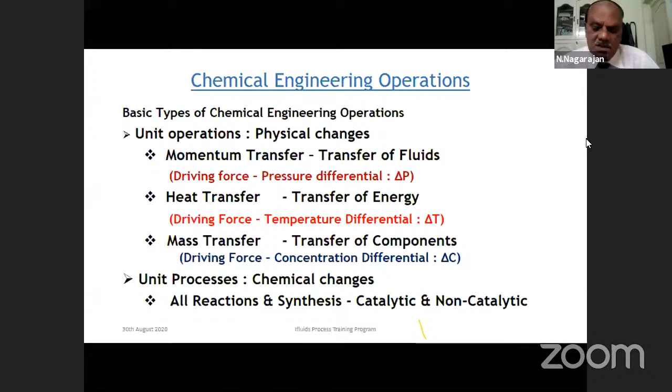the reactions and synthesis. The reactions, as you all know, may be catalytic or non-catalytic. Some reactions happen without any catalyst; they are non-catalytic. Some reactions happen with the use of a catalyst. So two types of synthesis are there. So feed preparation, these are the major things, typical process plant operations. Typical process plant operations are feed preparation,

reaction. For a process plant to run successfully and produce the products, we need support systems like utilities, offsites, and logistics. Utilities, a very simple example is in the household we use electricity for running all the appliances, gas for cooking on the gas stove, and then the water system, water storage tank, and water sumps. These are all the support systems which make our life easy.

So in the chemical plant also you need such utilities like steam, water, nitrogen. These are called the utility plants. Offsites and logistics. Any process plant needs raw materials, and the supply of raw materials may be regular or sometimes irregular. In that case, you need to store the raw materials. That is called the offsites and logistics. Logistics is to bring the raw materials to the process plant and to take out the produced products to the consumers.

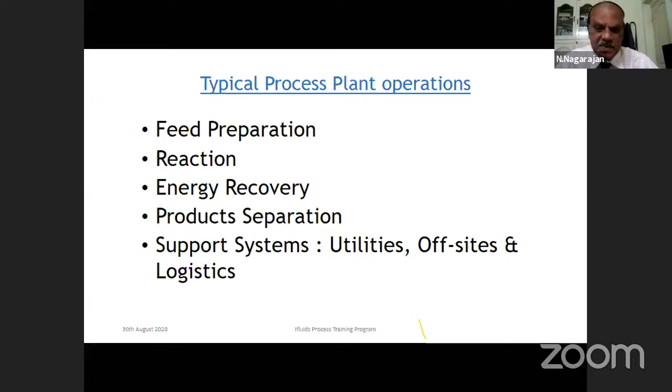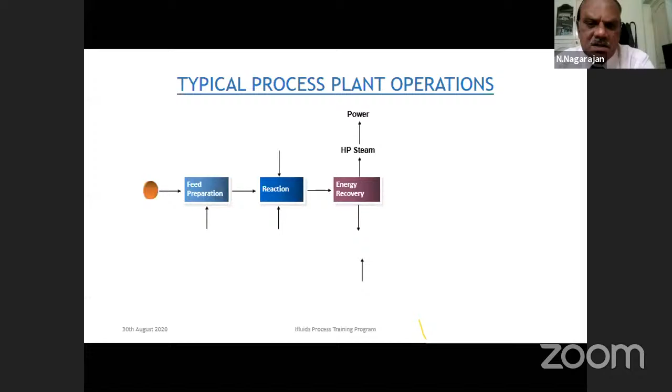So I'm just giving you a block flow diagram, which simply explains whatever I showed in the earlier diagram. See, we have raw materials, and many times raw material may not be in the proper form to subject it to the required change. So we prepare the feed, and for that we need some energy.

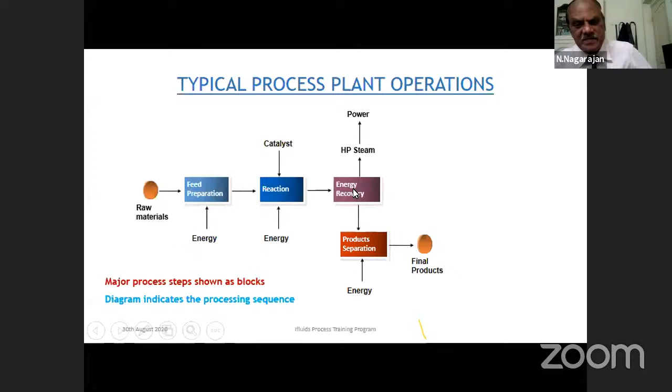Similarly, the prepared feed material or raw material undergoes a reaction, which may need a catalyst. If required, catalyst is added, and again we need to add energy. The reaction products come out with a lot of energy. So we first recover the energy, cool the products, and then from the energy we make steam, and from steam you can make power.

So then the reactor effluent goes for product separation. This is where your mass transfer operations come. We separate the products and we get the final product. Sometimes we may get additional products which are called byproducts. So you can see at every stage there is energy, either energy is consumed or you supply energy.

Sometimes if it is an exothermic reaction, you may remove the heat from the reaction to make the reaction proceed in the forward direction. So this is called a typical block flow diagram, which shows the process plant operation in simple blocks. And the diagram shows the sequence of processing.

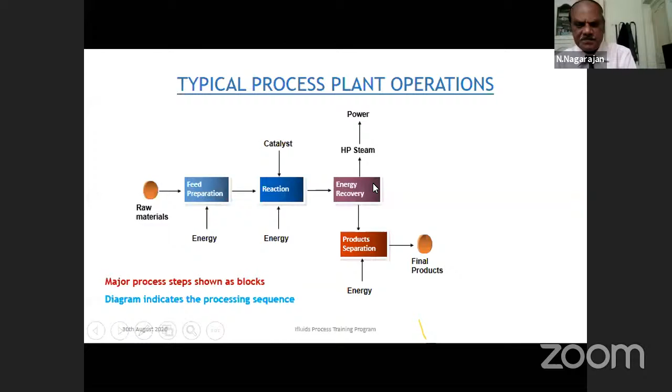Now we talk about the hydrocarbon sector. We commonly call this a hydrocarbon sector, which is a very big industrial sector, and which is again divided into three sections. One is oil and gas projects. You all know crude oil and natural gas are available from the earth. A lot of exploratory work is being done. There are companies which do the oil exploration, gas exploration, and they bring out this wonderful raw material.

This is called black gold. Many of you know crude oil is called the black gold. So it fetches so much of money. Once oil and gas are extracted from the reservoirs underneath the earth, they are subjected to some separation operations. We separate the oil, gas, and then feed them to the downstream units. So the oil and gas projects are called upstream.

Then from this, the gas goes for the energy sector. You can make electricity by burning the gas in the gas turbines, or you can use the natural gas for making a lot of chemicals, petrochemicals, fertilizers, etc.

Then the crude oil goes to the refinery where a lot of value is added. We may ask, crude oil as such, what is the value? Crude oil as such has a very low fuel value. That's all. If you use crude oil as such, it will be a very low grade fuel. But if you refine it and segregate it into various products, they get value addition. And the value of crude oil is many times enhanced. So that operation is done in the refineries. These are called midstream.

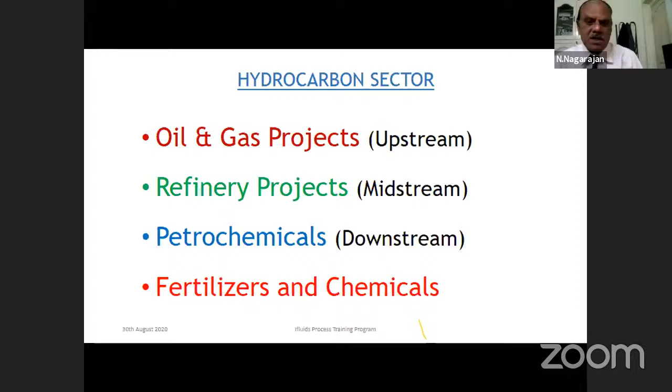So the next diagram is also a block flow diagram, an overall block flow diagram of the oil and gas industry. I have not shown the chemicals and fertilizers here. So whatever I explained there, oil from the wells, oil and gas, they are separated. Gas goes through a number of purification steps in the gas plant. Then purified natural gas either gets liquefied and sent as liquefied natural gas, or through pipeline you send it to natural gas consumers, maybe the power plants or fertilizer plants.

And the impurities like hydrogen sulfide, carbon dioxide, etc. will be removed in this gas plant. They are called the acid gas. They are treated. If it is H2S rich gas, you can separate the H2S from the natural gas and then make pure sulfur from the H2S.

Why do we liquefy the natural gas? You may be wondering what is the purpose. You all know carrying gas requires a lot of effort. You have to put long pipes and transport the gas over distances, and pipelines are very expensive if you put them for long distances and all.

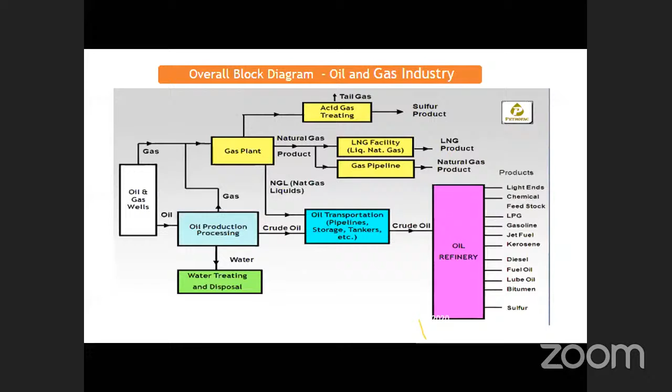Another way of transporting natural gas to consumers is liquefying the gas. It reduces in the proportion of 600:1, that is 600 volumes of natural gas when liquefied becomes 1 cubic meter. So you can really understand and appreciate the reason for liquefying the natural gas.

Then the liquefied natural gas can be transported through large ships, large cargo ships. So that is on the gas part.

Then oil is processed, and any water associated with the oil is removed, treated and disposed. Crude oil is transported through pipelines, okay, or ships, large ships.

Oil refinery. From oil refinery, we get a number of products: light ends, which are called fuel gas, chemical feedstock, that is naphtha, and LPG. You all know jet fuel is used as aircraft fuel.

Then you have household fuel. Then you have diesel for automobiles, fuel oil, lubricating oil. The final thing is bitumen, which is also called asphalt, used for road laying and all.

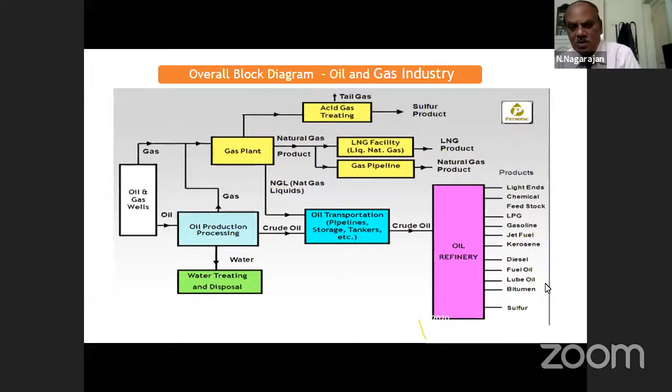Okay, so now we get into the process engineering design activities. What is the function of the process engineering consulting and engineering companies? So how is the process engineering design developed? It happens in a number of stages.

One is concept study. Any new product development starts with a concept. Concept is on the paper, like you see the reactions even in the textbooks and all. The concept is about conceptualizing the raw material to product. It gives broadly, technically, this product can be manufactured from these raw materials, and the properties of these things will be like this. What are the various steps involved in converting the raw material, like a block flow diagram.

Okay, so then next stage is feasibility study. So you all have to understand one thing, that a technically viable product also should be commercially viable, because any company investing money in establishing a big processing facility has to sell the product and make money, correct? Otherwise, there is no use of spending money. So they would like to see the commercial viability of the process.

So the feasibility study is carried out by companies who are specializing in conducting feasibility studies. They study the technical feasibility, and also they try to see whether one route is possible or more process routes are possible to obtain the products from the same starting material. Then they conclude the technical feasibility.

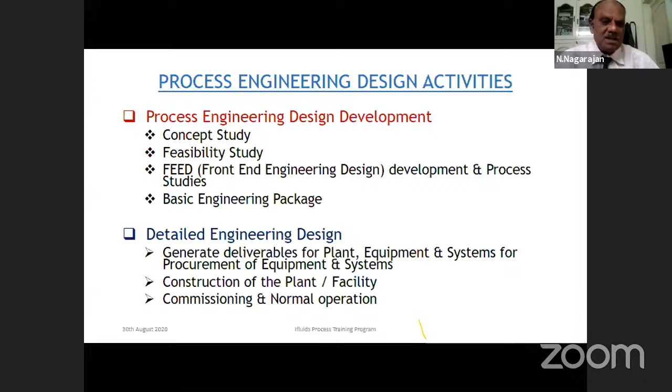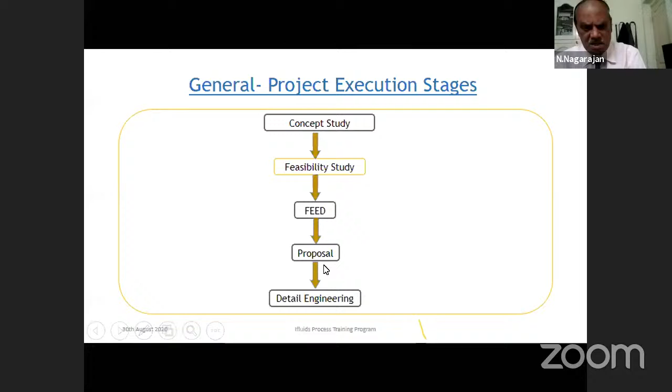The same flow diagram: feasibility study, then from feasibility it goes to FEED stage. FEED itself can be floated as a proposal, and after somebody wins, he will do the execution of the project.

Now we see what are the process engineering design activities where chemical engineers are involved. The first one is process simulation. Most of you have heard about simulation, and I've seen some colleges even have simulation software. Process simulation is nothing but building the entire processing facility in the software environment. This gives you the complete heat and mass balance across the plant, and also gives the process flow scheme, which is then developed into the process flow diagram.

The next stage is having all the design parameters available from the simulation, like flow rates, pressures, temperatures, compositions, and the energy content of various streams. For each equipment you will have these streams available, so you have to size the equipment like distillation columns, heat exchangers, fired heaters, separators, vessels, etc.

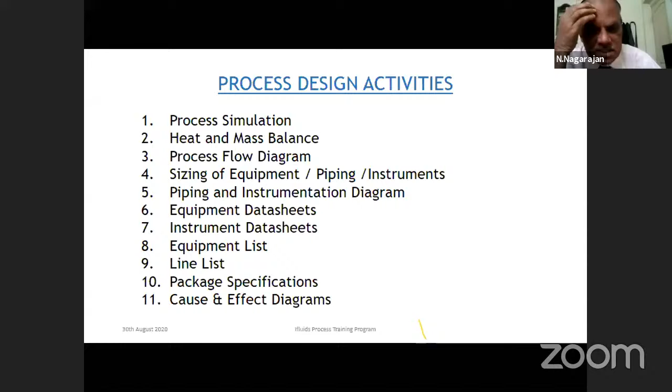Then piping is very, very important. You have a number of pieces of equipment in the process plant, and all of it is connected by piping, so piping is an important part. It can be compared to our blood vessels in our body - blood is circulated throughout through arteries and veins of different sizes, as small as less than hair thickness. The same thing is done by process plant piping in carrying process fluids from equipment to equipment. That is one important discipline.

Then you have instruments. Any process needs measurement of the various parameters and control of the parameters. So along with sizing of equipment and piping, you have to devise all the measuring instruments and control instruments. That is called the sizing of these things.

Once you know the sizes of the equipment, the piping requirements, and the instruments for the process, we make the piping and instrumentation diagram, which is the detailed schematic. Every vent and drain, even half an inch size lines, will be shown in the piping and instrumentation diagram. It is a very detailed engineering drawing for the process plant - I would say this is like the plant's horoscope.

It goes all through the life of the plant, so whenever you make changes in the plant, that should be incorporated in the piping and instrumentation diagram. This is a very, very important document, and it is the only process engineering document which goes for construction of the plant and its commissioning and operation.

Then afterwards, we have to make data sheets for each and every piece of equipment.

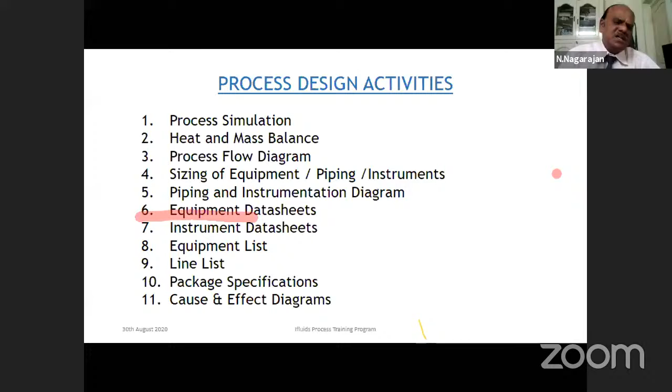Then the process engineer makes certain lists, so you don't miss out any of the items. You make the list of equipment. Whatever equipment comes in the process, you make a complete list of the equipment. I will show the details of these deliverables. Then the line list: each and every piece of line piping connecting the individual equipment will be listed in a line list.

Then package specification. For certain things we don't do the mechanical design, we don't give sizes. For example, pumps: we say the pump should have a capacity of 100 cubic meters per hour, and it should develop a head of 100 meters. That is the pump specification. And we specify the pump material of construction depending upon the fluid it handles, carbon steel or stainless steel, whatever the material may be.

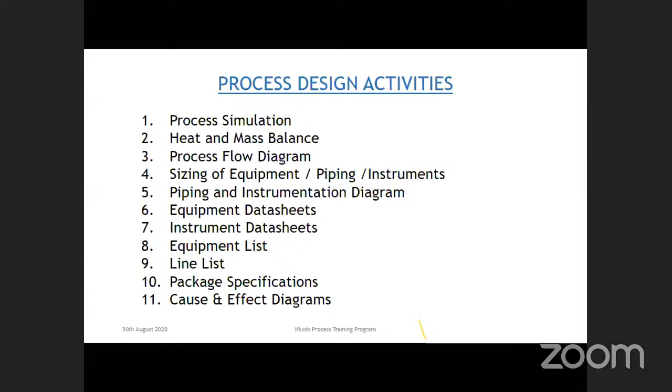And finally, the cause and effect diagram is nothing but the changes happening in the process. I will explain this in the subsequent slides. Cause is the change happening. Suppose you have a vessel half-filled with liquid, and you have a level control on it. Something is pumping liquid into the vessel, and from the vessel, after some changes, it is being pumped out. The level is being continuously measured on monitors.

So what is the control you need here? There are high and low limits for the liquid level in the vessel. If the level goes high, the vessel will overfill and it will lead to some catastrophe, some accidents. So when the instrument measures high level and gives an alarm, what is the next action? What is the cause for the increase in level? The feed coming in may be more. So you close the inlet, it comes back to normal, then you can start allowing the inlet to this vessel again.

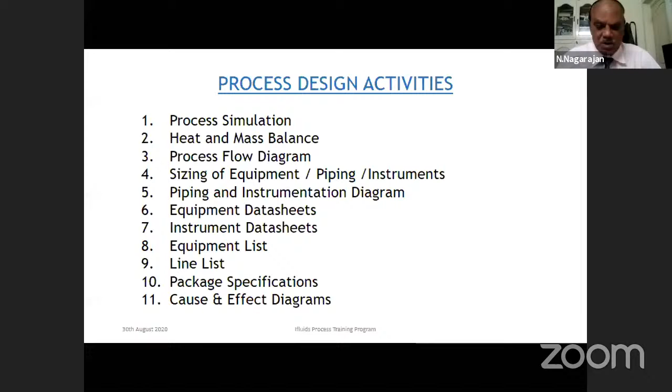Similarly, the liquid is being pumped out from the vessel to some other use. When it hits the low level in the vessel, you should not allow it to go into the pump, because the pump may get gases or vapors and your pump will cavitate. So you have to stop the pump when the level goes low. Until the level regains normal, you won't operate the pump. So these are some cause and effects.

The basic design we develop is the design basis. You all have studied stoichiometry, the heat and mass balance subject. For any problem you are given, you always fix a basis. You will say feed rate 100 moles per hour, and maybe you will assume a certain pressure for the raw material. These are all called design basis. In large plants, the design basis is a very important document. It lists out all the required conditions, a compilation of the various parameters used in the process. We fix the limitations and the values. That is called the design basis.

Then philosophies. What do you mean by philosophies? For any change or any operation to happen, we keep certain parameters, certain critical values, and we put some preconditions: this should be like this, the operation should be carried out in this manner. So we have various philosophies. One is called the operating and control philosophy. This tells you how to operate to get the required results from the process plant.

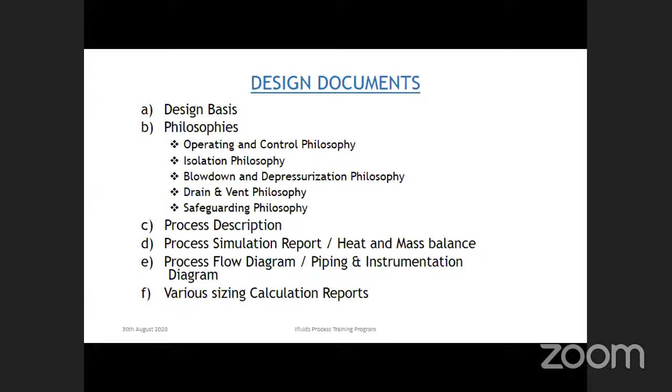Drain and vent, these are very important. These are useful during the commissioning and preparing the plant for operation. You want to drain and clean the equipment. Similarly, you want to remove the gases from any equipment, you should have vent provisions. So drain and vent, during normal running it may not be required, but during startup and shutdown these are required.

Safeguarding is there should be inbuilt safeguards in the process. Those devices we decide and incorporate in the design itself. These are all inbuilt safeguarding devices. This is spelled out in the safeguarding philosophy.

Then you have to write a process description, for anybody to understand what is happening in the plant, what you are doing with the raw materials, what are the various stages in the process till you reach the final product. So that is called process description. And then after you do this process simulation, make a simulation report, make the heat and mass balance tables, then make different diagrams, process flow diagram, piping and instrumentation diagram.

You all have to understand one thing, that any output from the design engineer is in the form of a drawing. Okay. So only drawings get converted into the actual equipment and plant. One of our professors used to say drawing is the language of engineers. So here also you will see whatever design calculations we do finally ends up in the form of a drawing. So we put dimensions of the vessel, diameter, height, etc.

So from the drawing only the equipment are fabricated. From the drawing only the plant is built using the various equipment and connecting pieces of pipes. And then various instrumentation and control systems are all coming from the drawing. So the drawings are very critical pieces of design documents.

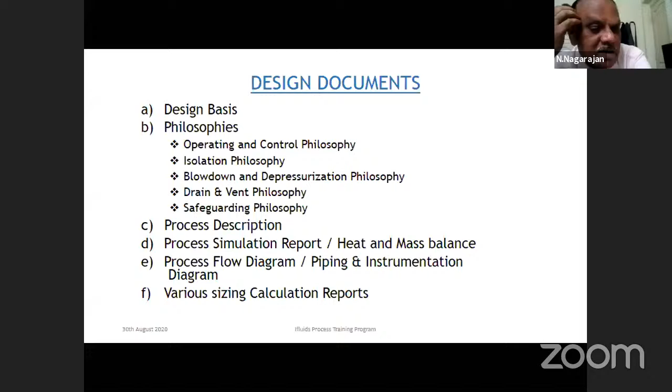And various sizing calculations. Any calculation we do, pump hydraulics, line sizing, etc., these are all compiled into calculation reports. These are all kept for the reference of the operating people as well as the process engineers. When we get a new project, your supervisor or your lead engineer will say, go to the similar project we have done in the past. You read all those things, then you will get a good understanding of the design procedures and calculations.

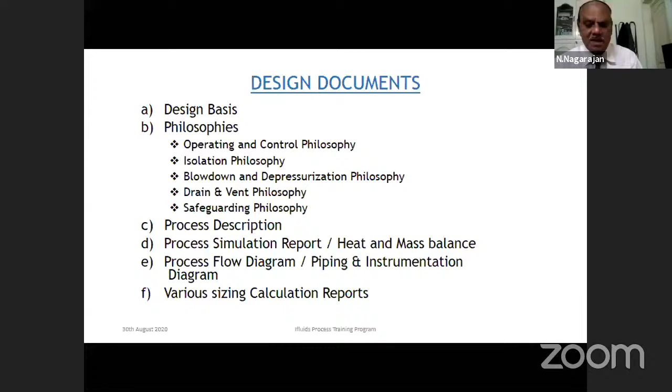Then further to that, the process engineer has to make a lot of lists, various lists. Because we are handling different fluids in the plant, we have to make a fluid list. What are the various fluids we use in the plant and what are their properties? What are their boiling points? What are their flash points, etc.

This is very important for the hydrocarbon sector, where we are using highly inflammable toxic materials. So this is used in establishing the safety of the plant. Okay, the safety engineer will take this data and he will design the safety systems. Equipment list I have already mentioned.

Line list is all the lines you show in the piping and instrumentation diagram, listed with their starting point, end point, what is the fluid handled, what is the operating pressure, what is the operating temperature, what are the design conditions, test conditions, etc.

Tie-in list comes only when you build a plant adjacent to an existing plant. You are connecting an existing plant to the new plant. There are connections made between the two plants. Maybe some material is transferred from the existing plant to the new plant. So in those cases, we connect them. It is nothing but tying the old plant with the new plant. That is called tie-in list.

Then data sheets we have already seen. Equipment, instruments, specialty items means in the pump you will be seeing the suction strainer, and we may inject some chemicals in the piping or equipment. They are called injection quills. Okay, such specialty items are also there. Specification for equipment for which we are not doing the very detailed design, they are called packages, like compressors, pumps, fired heaters, etc. Cause and effect diagrams we have already seen.

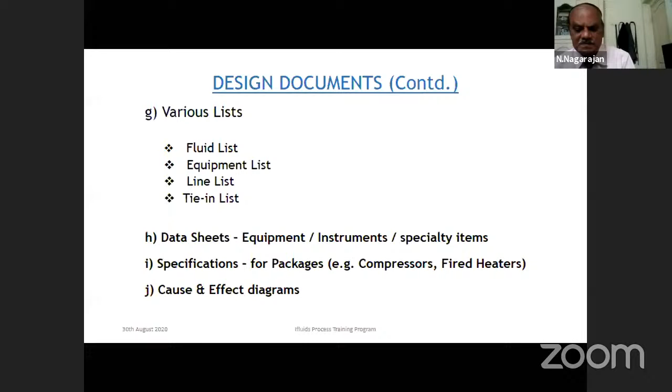Description of process deliverables: the basis of design I have already told. This is a very important key document. From the FEED onwards it is getting developed. It will give a description of the facility, location, where the plant is coming up, who is the owner, and

what are the inlet fluid compositions, what are the raw materials coming in, if they are gas or liquid compositions, what are the flow rates, pressures, temperatures, and physical properties of all the materials. And then what are the products we want to develop in this plant.

So we have to give detailed product specifications and where the product has to be delivered, and what are the conditions of the product. Operating range, what is the turn up, turn down?

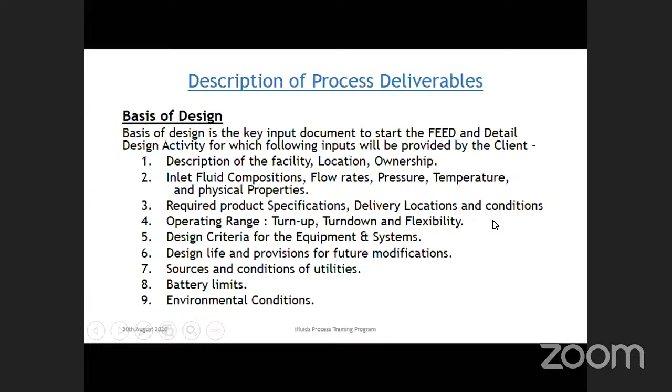Somebody has to mute their mic, I think. So the... Venkatesh B, please mute your phone.

Operating range is turn up, turn down. See, you have a capacity range. You will not run the plant at one particular capacity. If it is 10,000 barrels of oil per day, you must be able to run it even at half the flow rate. That is called turn down. The plant should be designed for a range of capacities.

Okay, if the design capacity is 10,000 barrels of oil per day, we usually design it for even half the capacity, 5,000 barrels of oil per day. And turn up is we slightly overdo the capacity. Usually 10% is done. I mean 10,000 barrels becomes 11,000.

So the meaning is your plant should be capable of operating with the desired operating conditions and product qualities from 50% of the plant capacity to 110% of the plant capacity. Some people call it flexibility. So for design criteria for all equipment, we have certain design criteria. Those are spelled out in the basis of design.

And life, usually we give 25 to 30 years for the operating life of the plant. That doesn't mean after 25 years we will close down and go. Many plants after design life also live 30 years, 40 years till they become obsolete or the technology is obsolete. It can run, but minimum guaranteed design life for any plant should be 25 to 30 years.

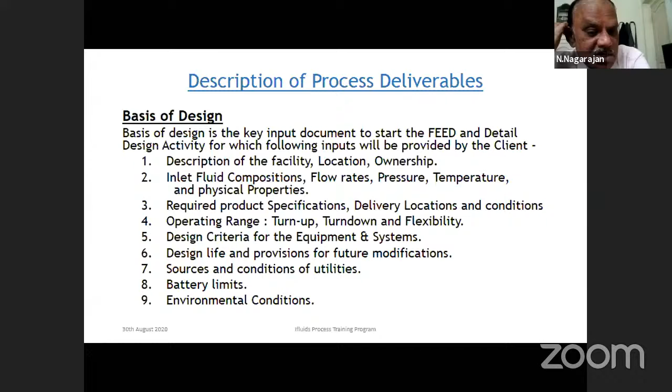The rainfall, wind speed, wind direction, humidity, highest temperature, lowest temperature, whether there is any snowfall or any sandstorms. In deserts, you will have sandstorms. All these things will be spelled out in the environmental conditions.

The process flow diagram is a very important flow diagram. It is a schematic drawing. It is one step more than the block flow diagram which I have shown. I will show a sample diagram, so no problem. So it is a schematic drawing of all the connected equipment, and the complete scheme is shown with major controls.

Okay, all major equipment will be shown. All the interconnecting lines including the utilities will be shown, main control loops will be shown, the shutdown valves and emergency shutdown valves; these are all used during operational upsets or startup and shutdown. Heat and mass balance will be shown. Any PFD should have a heat and mass balance. Every interconnecting line on the PFD is given a number; that is called the stream number.

So for each stream, there will be a table which gives the stream description, composition of the stream, its mass flow rate, molar flow rate, its density, viscosity, thermal conductivity, etc. All the physical properties. That is the heat and mass balance.

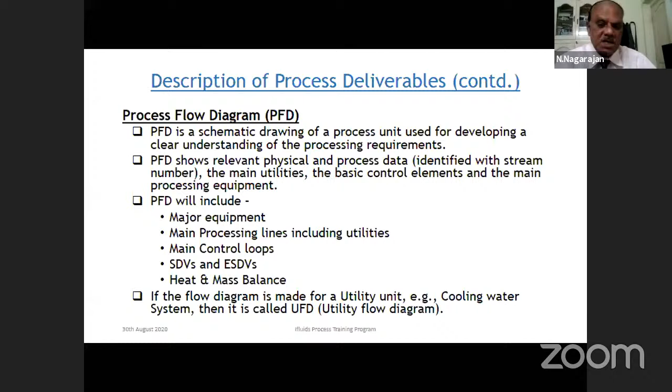Here the gas is separated and the balance liquid is taken to the second vessel and some pressure let down across the level control is done. So when you reduce the pressure, what will happen? Some more dissolved gas from the liquid will be coming out. Similarly, you can have a third level separator also. So all the gases separated from this equipment are all connected, and then the gas stream is taken for further processing. Liquid stream is taken for refining, crude oil refining.

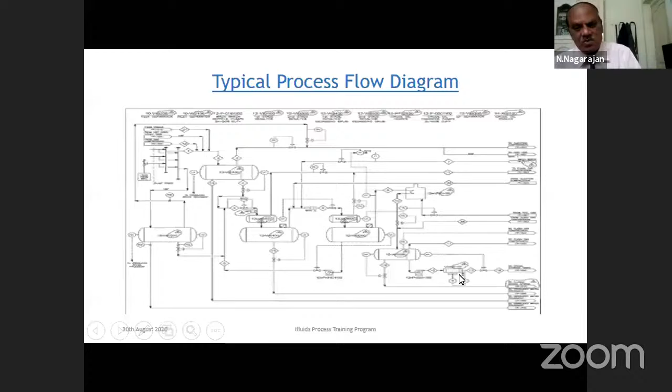The piping and instrumentation diagram is the very key document for any process plant. It is a very much detailed version of the PFD. For understanding purpose, you can say piping and instrumentation diagram is the very much detailed version of the process flow diagram. Every bits and pieces of the plant is shown here. All the process lines, all the utility lines, all the equipment with installed spares.

Suppose mostly pumps are spared. You know what do you mean by spare? Spare is an extra equipment. Pumps should not fail. If one pump fails, because of that you have to stop the plant, means it's a big production loss. So such a critical equipment we always put two. If I need one pump, I will put two pumps of equal capacity. So one pump will be online.

If that pump creates any trouble, we isolate that pump and switch over to the spare pump. So the spare pump will take care of the process. The pump which is having trouble will be maintained and kept ready for any changeover. So this is called the spares. These are all coming as part of philosophy. Process philosophy will say spares philosophy. There is a spares philosophy. Don't think that all the equipment will be spared. Only pumps and exchangers may be spared, but not the big items like compressor and all.

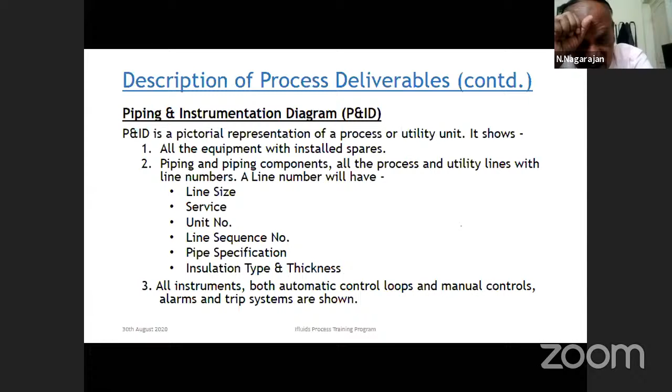Also to protect the people working in the plant. Accidentally, if somebody touches the pipe carrying a hot fluid, they will get a burn. So to avoid this and to avoid energy losses, we insulate the lines. All the insulation type and thickness of the insulation will be given here. All the instruments, control loops, manual controls, alarms, trips, everything will be shown here.

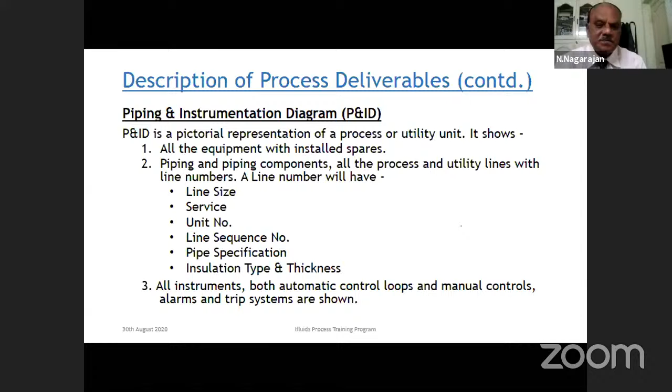So other details are valves. What are all the different types of valves? You have gate valves. Most of you know gate valves, globe valves, ball valves, check valves. All these different types of valves are used depending upon the process requirement. They all will be shown.

Heat tracing: suppose some line is carrying some hot fluid which should not be cooled down; it may become a solid if the temperature falls. So you heat the line, using electrical heat tracing or steam heat tracing. And then insulation. Specification break: many times in the process, when a process change occurs, the material of construction may change. So you have to change the material spec, from carbon steel to stainless steel. Wherever the change happens, we call it a spec break.

Scope: we have to put a battery limit. Suppose for a compressor, we will put a dotted box inside which we show the complete compressor is by a vendor, a supplier. So that is the scope of the vendor, and we put a scope identification. Pipes will need slope sometimes; if it is a gravity flow, we have to give some slope. Specialty items, I already told: filters, injection devices, etc.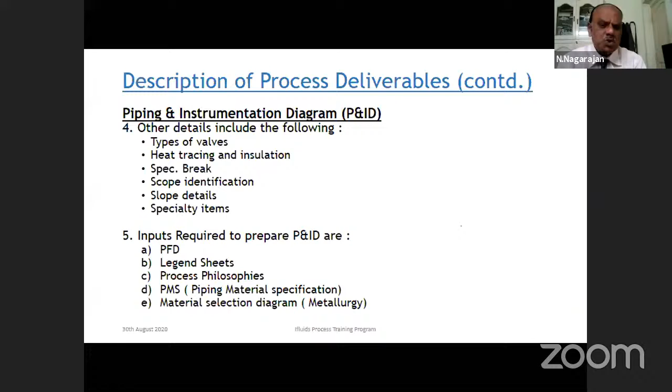So what are the inputs required to prepare a P&ID? We need the process flow diagram. We need legend sheets; I will show some legend sheets. And process philosophies, piping material specification, and the material selection diagram: what are the materials to be used for various pieces of equipment?

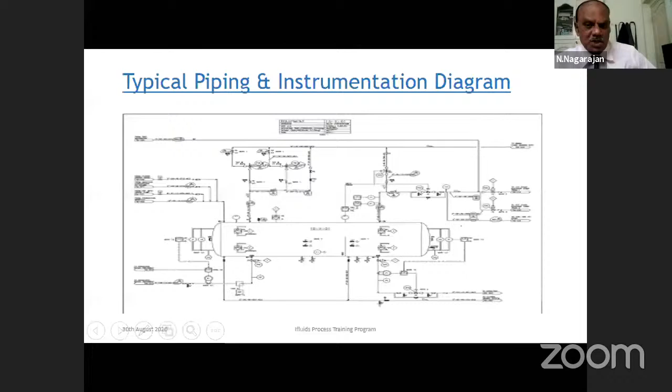Again, this shows a P&ID. In the PFD we have shown 2-3 equipments together, but in the much more detailed piping and instrumentation diagram, we see one equipment. This is a large separator. It has an inlet, a gas outlet. There is a safety valve here. There are drain connections, oil outlet, water outlet, and level controls, the level control on the other side. You have pressure controls. So much detail is shown. So one PFD may split into a number of P&IDs. That much you should understand.

Equipment list: each and every equipment will figure in the list. The details shown are the type of equipment, meaning heat exchanger, column or vessel; number of equipment, if we have more than one, we say one operating, one standby; equipment dimensions, diameter, length, etc.; operating pressure and temperature. For design pressure and temperature we always give a margin. The vessel will not be exactly designed for the operating pressure and temperature.

We add some margin. Suppose we have 10 bar operating pressure, we will put at least 10 to 15% more; it should be about 12 bar design pressure. For temperature, we add 15 to 20 degrees. If it is 100 degrees operating temperature, we put 115 degrees, or whatever maximum temperature the vessel will be seeing during upset conditions. When you do steaming of the equipment, if the steam temperature is higher than the operating temperature, the steaming temperature should be the design temperature.

Material of construction for that equipment. Power consumption: if it is a pump, you say what kilowatt is required for running the pump. Accordingly, the motor will be selected by the electrical engineer. Weight information: usually for vessels, we have to give the empty and water-filled weight.

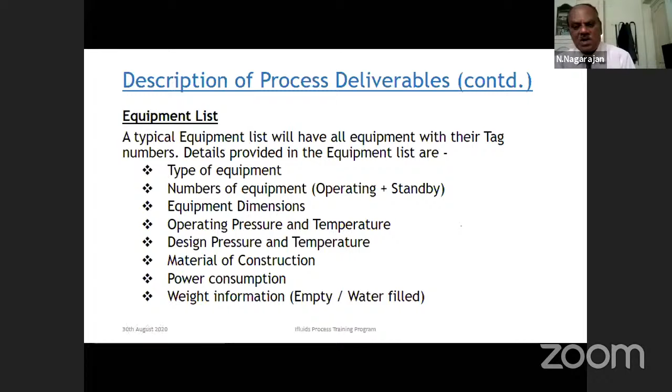This is a typical equipment list. All parameters are listed like this. I am really not sure whether it is legible, but don't worry. Whatever parameters were explained in the previous slide are put in a tabular form. This is the deliverable in the final form.

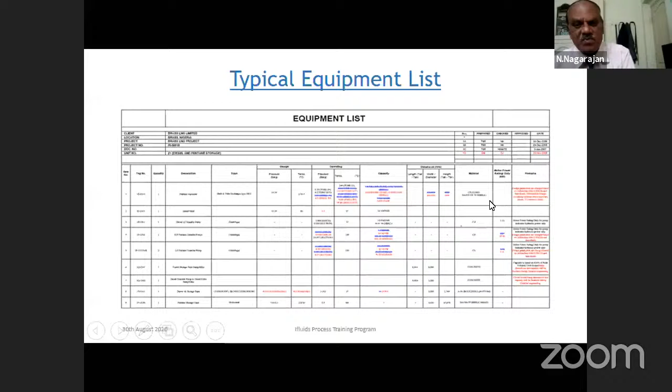Line list: similarly, it will list all the lines in the plant, with line size, the fluid handled, pipe material specification, insulation type and thickness. Every piping will have the operating conditions, design conditions, and where the line starts and where the line ends. If the line crosses through a number of drawings, you give the connecting P&ID number: this line comes from this P&ID and passes through this P&ID. If it goes through a number of P&IDs, we have to put an OPC connection. This is called an OPC connection.

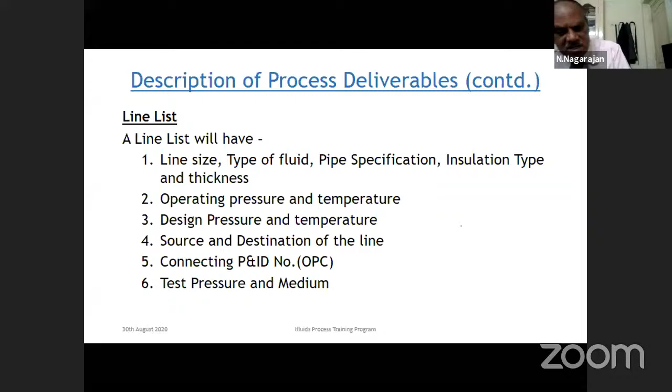All pieces of equipment and piping are always tested at a pressure higher than the design pressure. Usually piping is tested at 1.5 times the design pressure. And what is the testing medium? Usually we use water. Water is the test medium. It is called a hydrostatic test. So this is a typical line list. Again, this may not be very legible, but whatever parameters were explained in the previous slide are all listed here.

In the list, you will find one last column, remarks. If you want to put any specific condition against any equipment or line, you write it here. For example, this line will have vibration. Suppose the line is connected to a compressor, there will be mechanical vibrations. We have to write that this line is compressor discharge, so it will have vibrations, etc. All specific things we put in the remarks column.

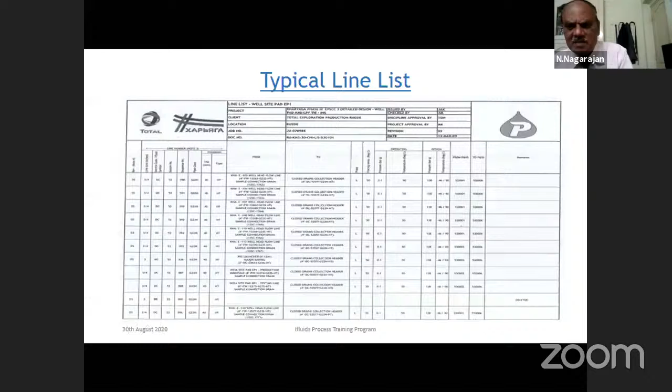Cause and effect diagram is the compilation of the process causes and resultant effects. Some time back I explained that for all the process operations, you will have this cause and effect. The example was high liquid level in the storage tank.

This is the cause. What is the action? When it reaches the high level, an alarm will be raised, the operator will be alerted. He has to go and close the inlet valve. That is the effect. Similarly, if the liquid level in the vessel hits a low level, the first level is alarm, low level alarm. Operator will be alerted, he will go and stop the pump. If the operator is not acting, you may ask what will happen. So there are automatic trips. If the operator misses the alarm, the next level of safety is automatic trips.

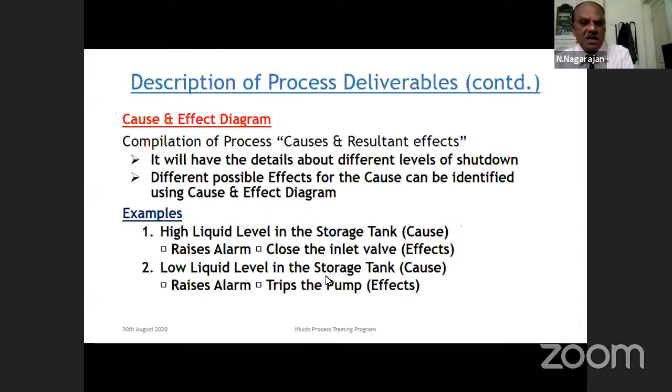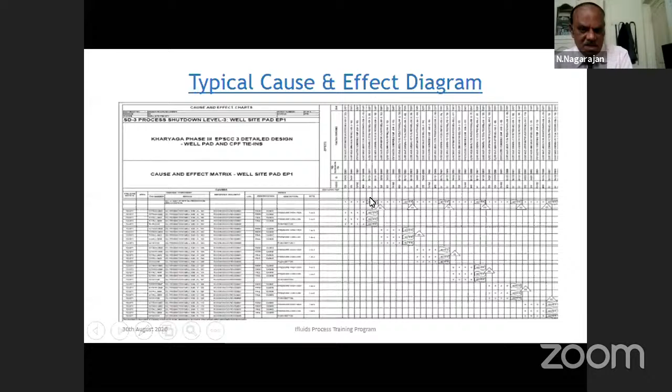The data sheet gives more details about each and every equipment: dimensions, orientation, whether it's a horizontal or vertical vessel, what fluid is handled in the equipment, its composition, properties, pressure operating and design, temperature operating and design, and nozzle size. All pipings are connected to the vessel: inlet nozzle, outlet nozzle. We have vent nozzles, drain nozzles, level instrument nozzles, temperature measurement connections. All those nozzles will be shown in the equipment drawing, so you have to make a sketch and show all the nozzles. Then as usual, material of construction for the different parts of the equipment.

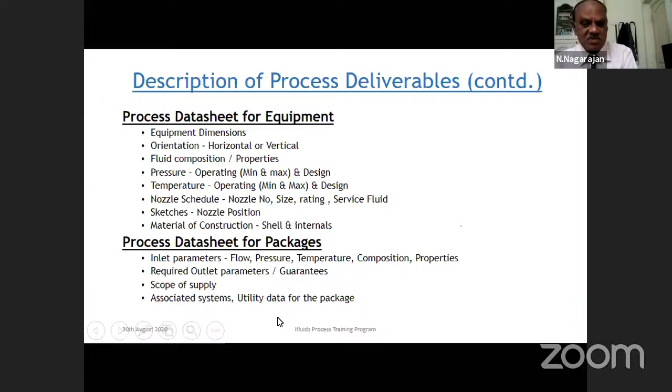For packages, take a compressor for example: you specify the inlet flow to the compressor, the inlet pressure, inlet temperature, composition, properties. Then what is the requirement at the outlet? The gas should be compressed to a certain higher pressure. What are the guarantees to be given by the compressor vendor? Scope of supply: what the compressor supplier will give, what items we will be supplying - this is scope definition. And what are the utilities required for the compressor package, we have to tell the vendor, and he will tell you how much he requires.

For instruments, we make instrument data sheets for flow, pressure, temperature, level, and analyzers. These are the important process design parameters. As input we have to give fluid properties, density, viscosity, etc., and flow rate. For instruments we have to give a range, not one value. For level, we have to say what is the minimum level, what is the normal level, what is the maximum level. Pressure minimum, maximum, temperature minimum, maximum. Composition: we have to give the various components in the fluid.

Level settings, as I said earlier: low level, triple L, low liquid level, is the alarm point. This is the normal operating level. High level, HLL, high liquid level, is the alarm point, and high high liquid level is the trip point. When the operator doesn't listen to the HLL high liquid level alarm, and it exceeds the HLL level and hits high high liquid level, the equipment is tripped.

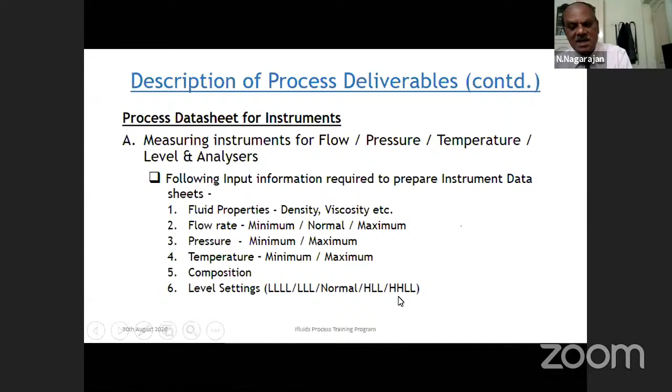For valves, we again have pressure safety valves. We give the capacity of the valve, operating and design pressure, set pressure - at what pressure the safety valve should open and release the excess pressure, and back pressure. More details will come on that, don't worry. Again, like any other piece of equipment or line, you have to have operating and design temperatures, and various cases may be there for the safety valve.

And for control valves, we have to give flow rate, inlet pressure, what is the pressure drop across the valve, and fluid properties.

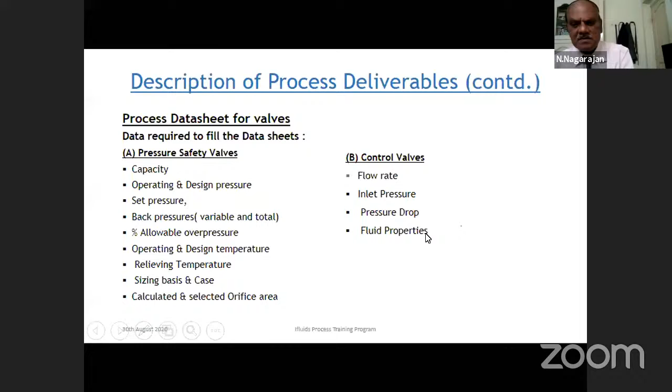Now the important thing I want to emphasize is that this is not a one-man army. Only process engineers cannot design the entire plant. You need the help of other discipline engineers. Let me explain the various disciplines involved in process plant design.

First and foremost is HSE engineers, health, safety and environment. They design the safety features of the plant based on our documents. We give them the PFD, P&ID, fluid list, etc., and they do the safety design of the plant.

Piping is another important discipline. They make the plant layout. We give the equipment list and piping and instrumentation diagram, and they make the layout showing how equipment is located, the distance between them, how they are connected, and how pipes are routed from equipment to equipment. Nowadays they have 3D models, all in a 3D environment using special software. It's really interesting to see the plant on the computer screen, and you can walk through the plant and see the various equipment.

Mechanical engineers are very important people. They do the equipment procurement. Based on our process data sheet, they make the mechanical design data sheet and send it to the vendor. They get the equipment details and drawings for rotating equipment like pumps and compressors, and they also design the HVAC - heating, ventilation and air conditioning requirements for the plant facilities.

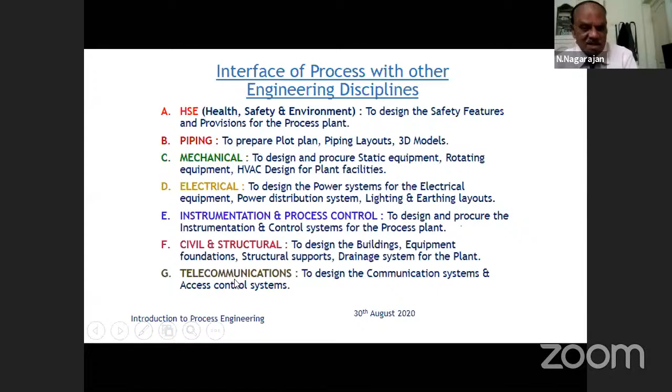Let me quickly go through the interfaces. For HSE, we give the process flow diagram, heat and mass balance, P&ID, and process data sheets. They use it for classifying the plant according to the hazardous nature of the fluids handled. The fluid list should also be added here.

Then the HSE department runs the HAZOP study - Hazard and Operability study. During the design stage, when about 30-40% of engineering is completed, the plant will be analyzed P&ID by P&ID, and any hazards identified require mitigation measures to provide enough safety. They also use the PFD and P&ID for fireproofing.

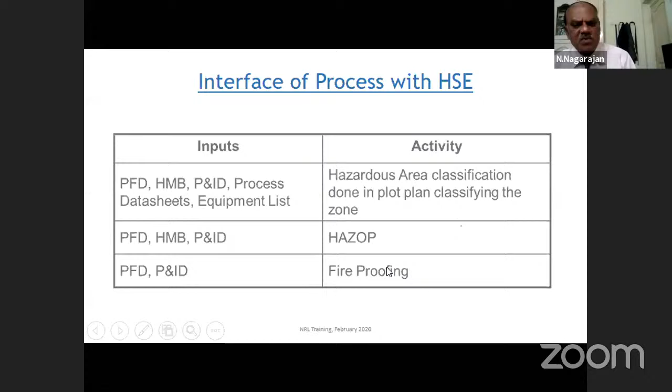For piping, they get the process flow diagram, utility flow diagram, P&ID, line list, and equipment list. They develop the complete plot plan, which shows the location of various equipment and how they are connected by piping. Material takeoff involves estimating the quantity of piping, material of construction, bill of quantity, etc., from which the cost of piping is estimated.

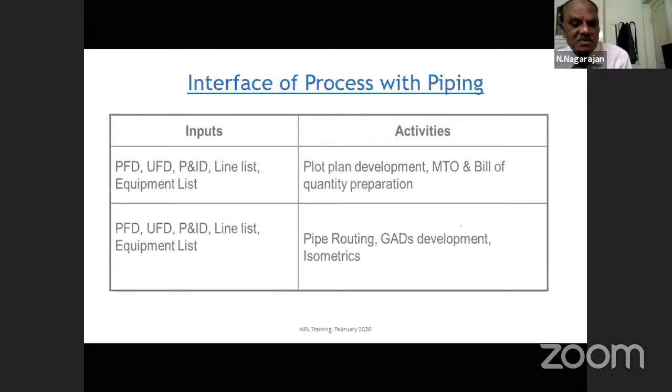Then from the same equipment list, they do the routing. One thing to remember - all the outputs from these departments come back to process. The process engineer has to review and ensure his requirements are met. You should not sacrifice any process requirement for the convenience of other disciplines - the process intent is very important.

Similarly for instrumentation, we give mainly the process data for inline instruments, actuated valves, and most importantly the P&ID, the piping and instrumentation diagram, which is extensively used by the instrumentation department. From that we do control valve sizing, but the instrumentation department finalizes it with the vendor, along with the logic diagram.

So when the plant will shut down, under what conditions, we give them the control philosophy, cause and effect diagram, ESD philosophy, emergency shutdown. Any fire happens means it is an emergency. So under emergency conditions, how the plant will be shut down - these are all given by process.

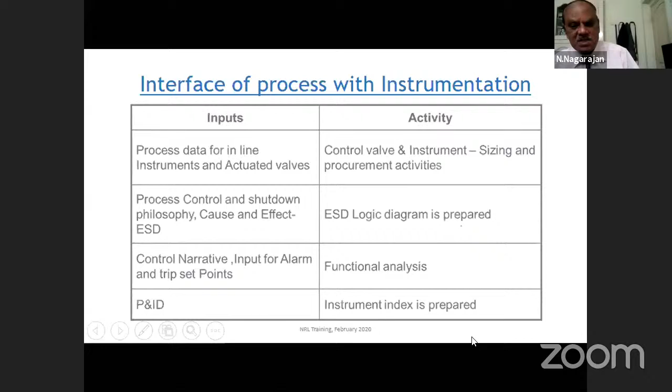Then these people will make the ESD logic diagram. Then control narrative, how the operation should be controlled, what are the various parameters to be controlled, what are the ranges of them, and the alarm and trip set points, all those things we give. They do the functional analysis. P and ID is used for instrument index and designing of the control system.

Electrical, we give them the electrical load list, all the electrical driven equipment, pumps - you must have studied this in theory also. Once you know the head of the pump and capacity of the pump, there is a formula to calculate the brake horsepower using the pump efficiency.

So we estimate the electrical load for the pumps and electrically driven equipment. That electrical load list is given to electrical. They will add some more margin, decide the type of motor, size of the motor, etc. Similarly, when there is any heat tracing required, as I mentioned earlier, to maintain the temperature in a particular process line, we tell them to use electrical tracing. If we say electrical tracing, they will design the electrical tracing requirement and the electrical tracing system.

From the equipment list and electrical load list, they will make the preliminary load list. They will make the single line diagrams for the power distribution.

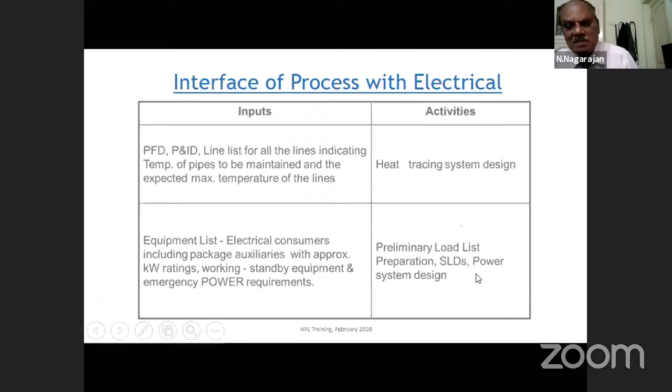Mechanical, we give them data sheets for equipment and packages. They make the mechanical data sheets, the request for quotation, send it to the vendor, get the vendor offers - all the procurement activities they take. And one important thing we have to remember as process engineers: all the vendor items, whether it is pump or compressor or any equipment coming from the third party, we have to review all the offers and see that the vendor has taken care of all the process requirements.

So it is the duty of the process engineer not just to design the plant and issue the data sheets, deliverables, drawings, but also to get the output from the other related departments, review them, and see that all the process requirements are addressed and taken care of. They also make bill of quantity, etc.

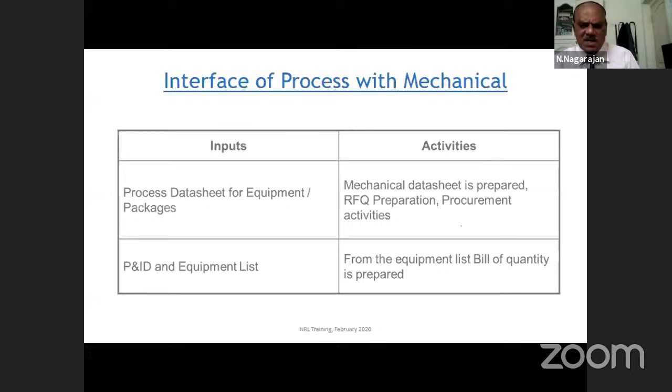So I think I have taken almost 1 hour and 15 minutes. I hope the material was useful to you. At least it has introduced you to the process engineering design subjects.

Now maybe you can raise your questions, and if somebody can read the questions, I will answer. Swishti madam, who is collecting the questions? Yes, sir, okay, I'm there, sir.

Thank you so much, sir, for this elaborated session of process design. Definitely, the final year students of chemical engineering - what they read in the book is totally different, because books will not give the experiences from the industry. So you have shared a complete journey, from the scratch to building a plant. So definitely, when these engineers join any industry, they will think about you, for how you have taught them, including piping, HAZOP, safety, or scratch level of design. So thank you so much.